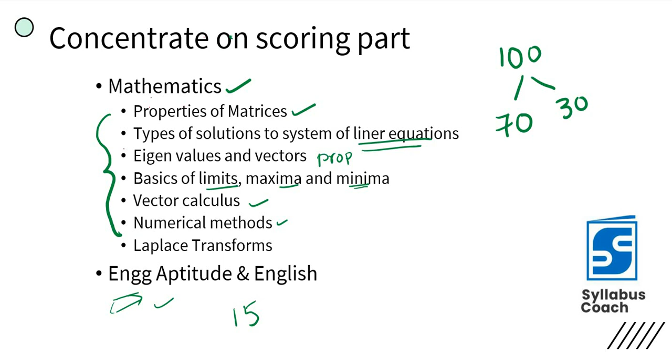Next, these are inevitable topics, meaning you should not leave these topics before appearing for GATE examination. Since we have 2 weeks of time, just revise these topics from each individual subject.

Coming to thermodynamics: laws of thermodynamics like zeroth law, first law, and second law. Next, work done problems, meaning integral PDV problems, and calculation of entropy change and irreversibility. Entropy change and irreversibility - definitely you'll have one or two questions in the GATE examination.

Coming to the properties of pure substance, and Joule-Thomson coefficient and inversion curve - this is also important.

Next, coming to heat transfer: we have Fourier's law of heat conduction, thermal resistance problems like the R thermal resistance problem. Such type of simple applications you may expect in GATE examination.

Next, overall heat transfer coefficient and critical thickness of insulation for cylinder and sphere - both are important. And all non-dimensional numbers like Prandtl number, Biot number are also important for 1 mark.

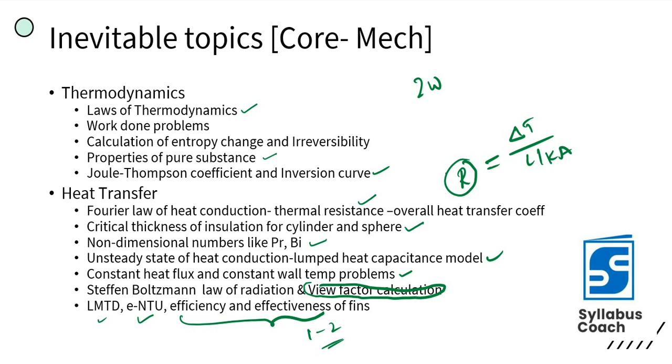Next, applications of thermodynamics: IC engine cycle diagrams. If you know all cycle diagrams, you will definitely have 1 mark in matching type questions. The second important problem you may expect from IC engines is this type of problem.

Cutoff equals some percentage of stroke volume - do not leave this problem before appearing for GATE. Just get good practice on it.

Next, brake power and mean effective pressure calculation - these are also important.

Next, Rankine cycle and Brayton cycle. In Rankine cycle, concentrate on reheat and mean temperature of heat addition calculation, and regeneration. These topics are easy and important too.

In Brayton cycle, the efficiency formula itself is very important, and regeneration problems. Next, coefficient of performance of reverse Carnot and reverse Rankine cycle.

See the terminology in psychrometry, and representation of all processes on the psychrometric chart. Let me draw this: on the y-axis, omega (specific humidity), and on the x-axis, dry bulb temperature. There are different types of processes on this chart. This is also important from an air conditioning point of view.

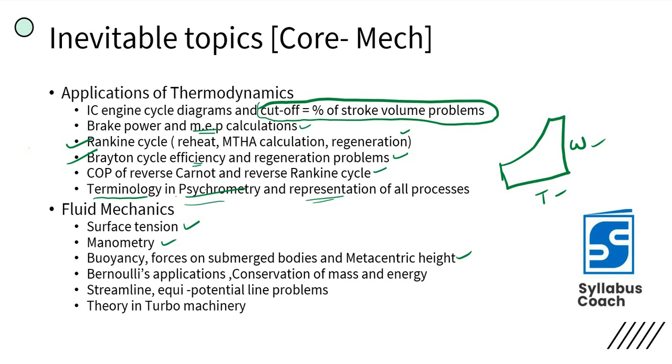Theory in turbomachinery like hydraulic efficiency and all. So since we have 2 weeks of time, allocate your time in such a way that you do not leave whatever topics I am telling you.

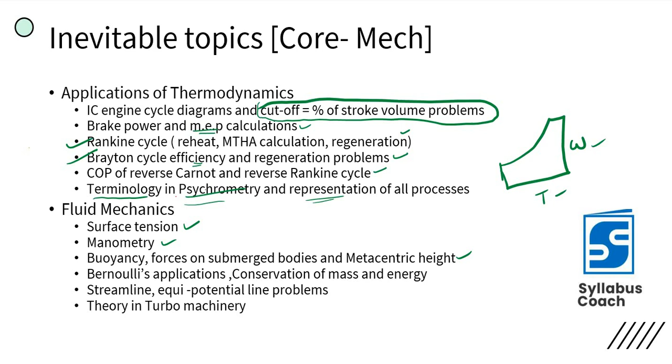See, coming to the manufacturing stream, the first one is the iron-iron carbide diagram. Okay, you may expect theory like what is the crystal structure and lattice structure of gamma iron, delta iron, like that, and lattice defects, what are point defects and two-dimensional defects and all. Heat treatment like annealing, normalizing and all. Next, in casting, mold filling time and solidification time, riser design and casting defects.

Next, see, I am framing all these topics keeping in mind that these topics are extremely important for GATE, after thorough verification of different problems in the last 10 years: efficiency of welding and calculation in butt welding and spot welding, soldering theory and welding defects, true stress and engineering stress relations and their graphs for mild steel, and wire drawing calculations. Next, sheet metal operations and calculations, rolling draft calculation.

See, rolling draft calculation and the relation between coefficient of friction and radius of the roller. This relation is also important. Machining time calculation in all types of machining, say drilling, milling, and all types of machining operations. What is the time required for machining? This is important. You may expect a 2 marks or 1 mark question from this.

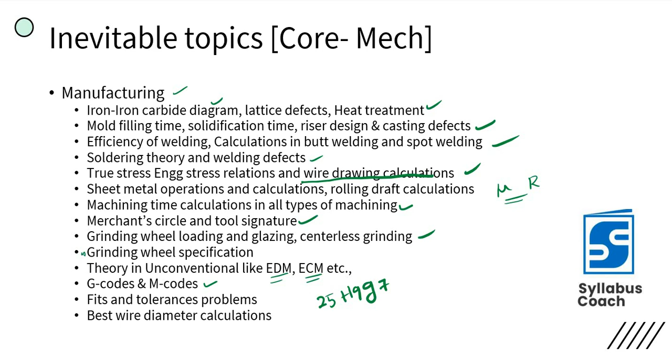Fits and tolerance problems. For fits and tolerance problems, concentrate more on problems like 25 H9 G7, such type of specification, and how to resolve such problems. Best wire diameter calculation in metrology.

Next, coming to the design of machine elements, problems on fatigue, Soderberg, Gerber, and Goodman theories of failure, and all theories of failure, like maximum shear stress theory, different types of failure theories. Design of riveted, bolted, and welded joints, life of bearing, and Sommerfeld number. Okay, theory of machines. Don't leave these topics.

First one is Kennedy's theorem for I-centers, instantaneous center of rotation, and inversions of four-bar mechanism and double slider crank mechanism. See, these topics you may expect for 1 mark. These inversions of four-bar mechanism and double slider crank mechanism, like the Scotch yoke mechanism and all. See, degrees of freedom formula and Grashof's law. Grashof's law, in the last 3 years of GATE examination, they are asking a 1 mark question.

Like they will give some link lengths, link 1, 2, 3, 4, all link lengths, and they ask this mechanism falls under which type of 4-bar mechanism. Means double rocker mechanism or crank rocker, like that. And velocity vector and Coriolis acceleration, terminology of cam, this is also important. Which cams are suitable for which applications.

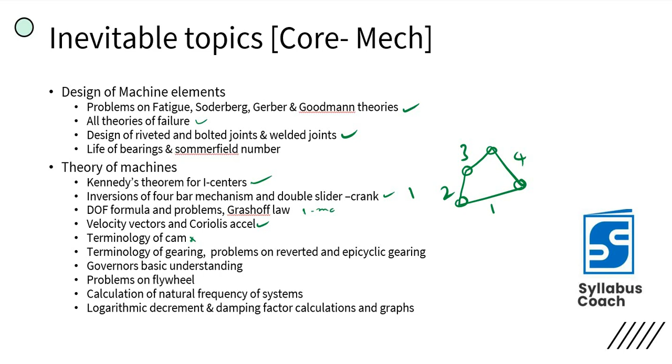And coming to the terminology of gearing, like module and small relations, also important. Problems on reverted and epicyclic gearing. See, you definitely expect a 2 marks question from the epicyclic gearing system. Next, governors, basic understanding of governors is required, and problems on flywheel, calculation of natural frequency of different mechanical systems. Next, logarithmic decrement, damping factor calculation, and graphs also important.

They are asking some very interesting questions, on natural frequencies and how the amplitude ratio graphs behave. And one more topic is gyroscopic effect on ships and aeroplanes.

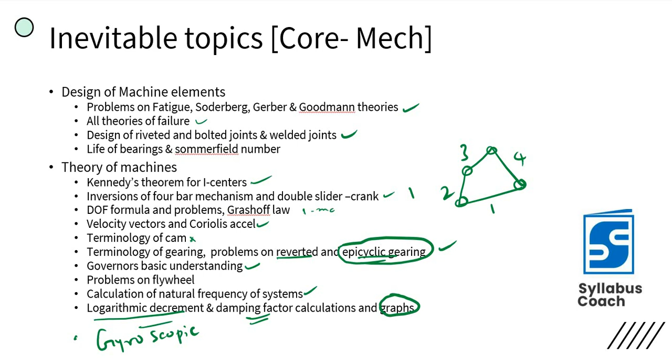And strength of materials: calculation of deformation and deflections, shear force and bending moment diagrams are very important. Deflection of beams, crippling load for columns, Mohr's circle, temperature stresses, meaning thermal stresses, strain energy calculations, angle of twist in shafts. These topics are important. You should not leave these topics.

And coming to engineering mechanics, problems on trusses, friction, basics of friction, and work energy theorem. Work energy theorem you may expect for 2 marks.